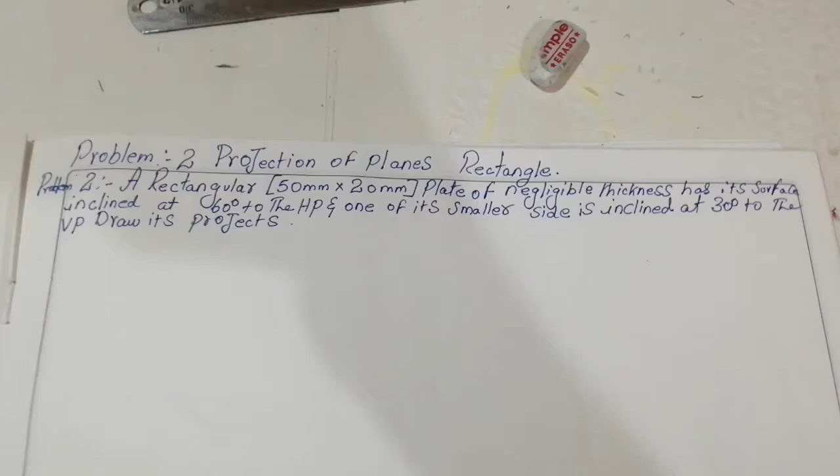Now I am taking problem number 2, the projection of plane in a rectangle. The question has given a rectangular plate 50 into 20 mm. The plate is of negligible thickness, and its surface is inclined at 60 degree to the HP. One of the smaller sides is inclined at 30 degree to the VP. Draw its projection.

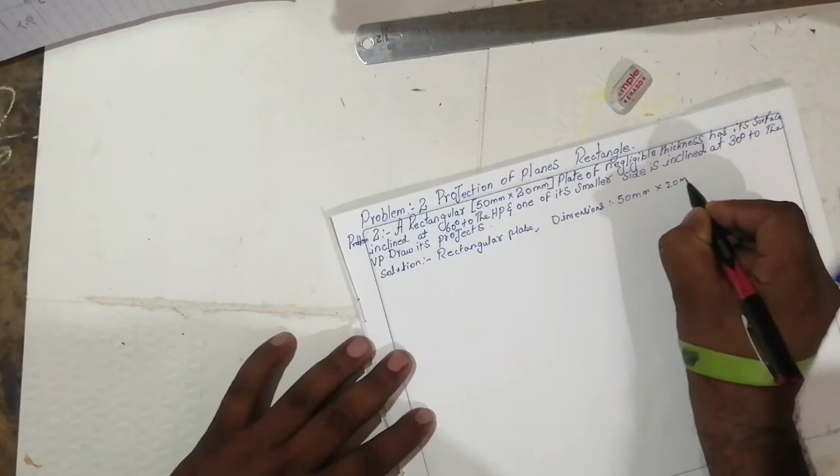So the question has been given like that. So the solution: given is the rectangular plate, the dimension is 50 mm into 20 mm. Theta surface is 60 degree, the angle made with HP.

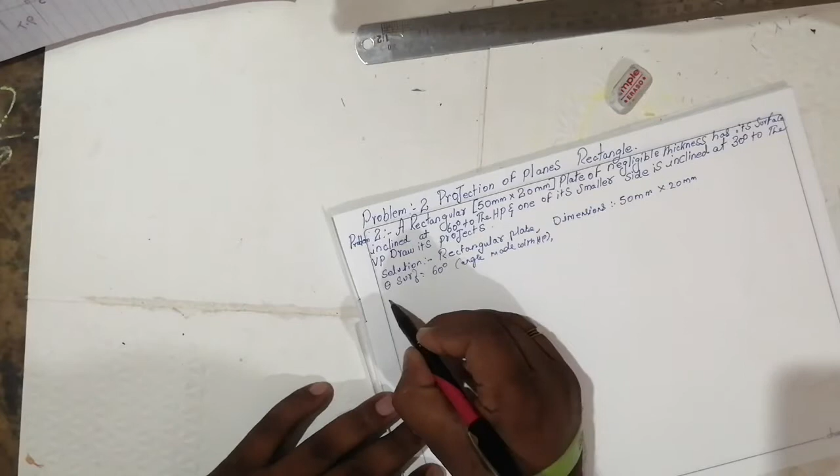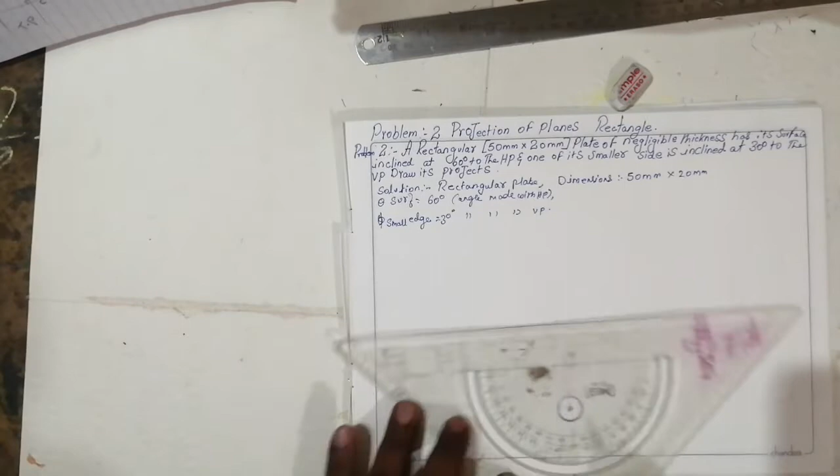Phi smaller edge is 30 degree, the angle made with the VP. So the question is given like that. Take x-axis and y-axis. It will be like this. This is x, this is y, HP and VP.

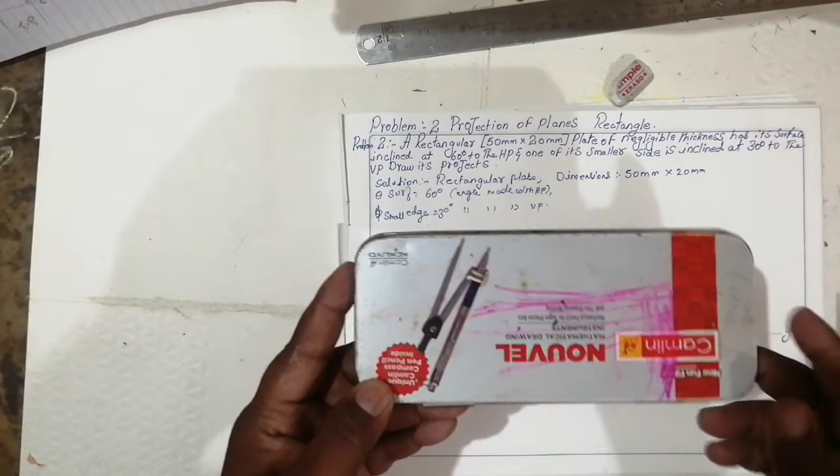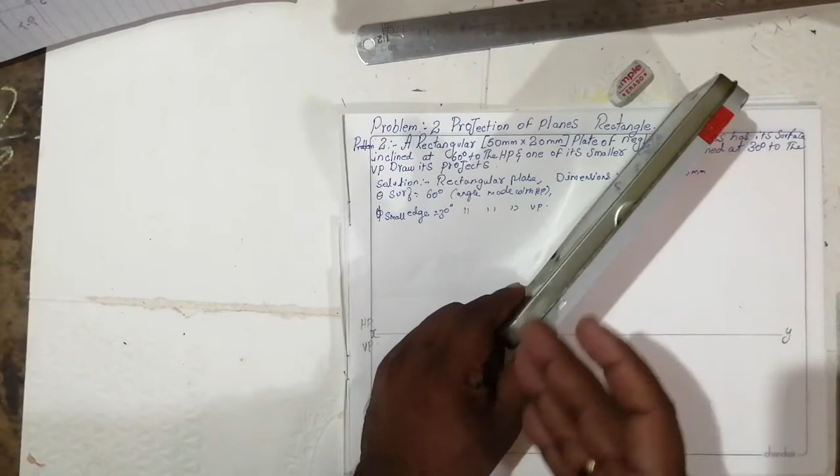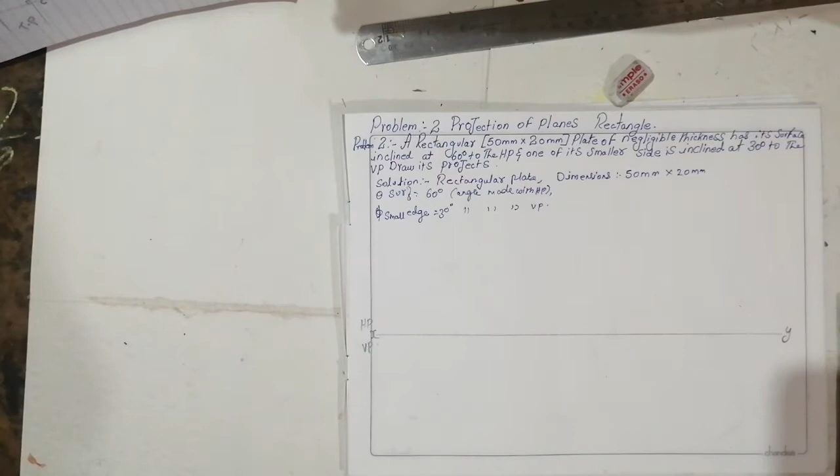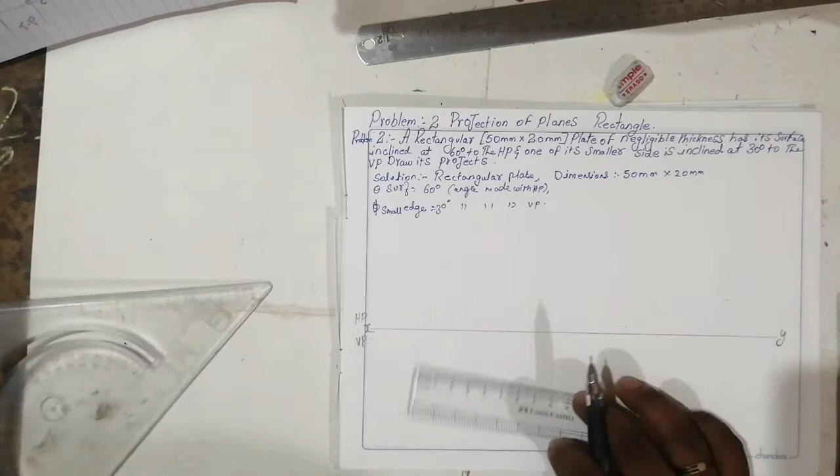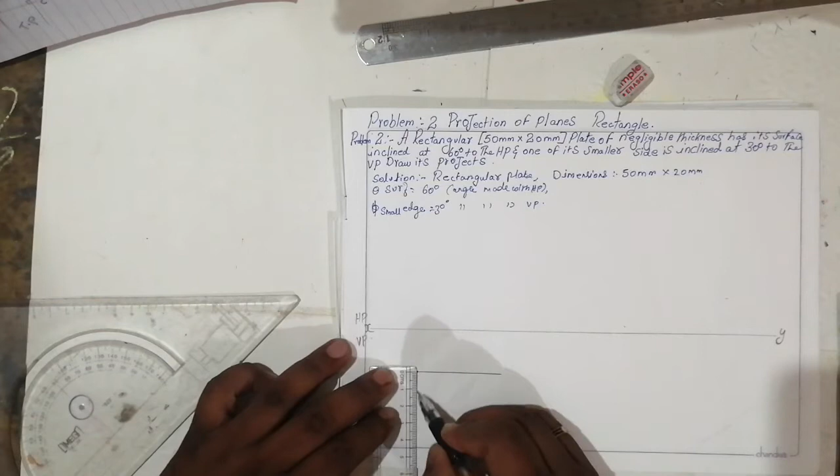The question gives 50 mm. So draw a rectangle of 50 mm and 20 mm, as given in the question. Name the corners A, B, C and D.

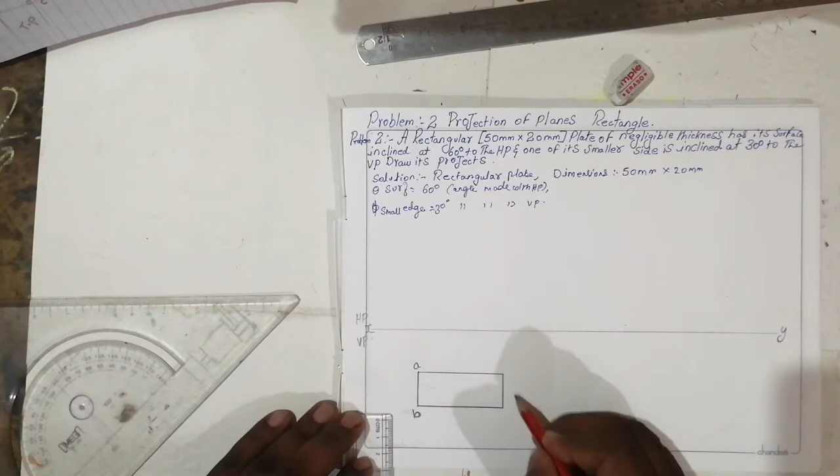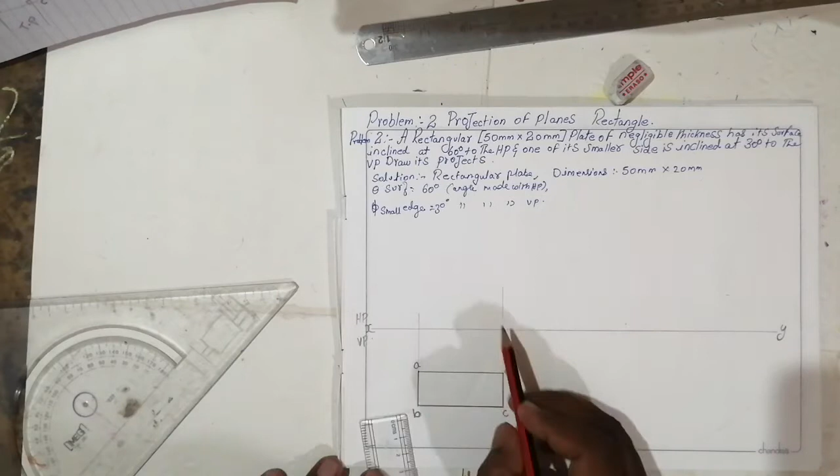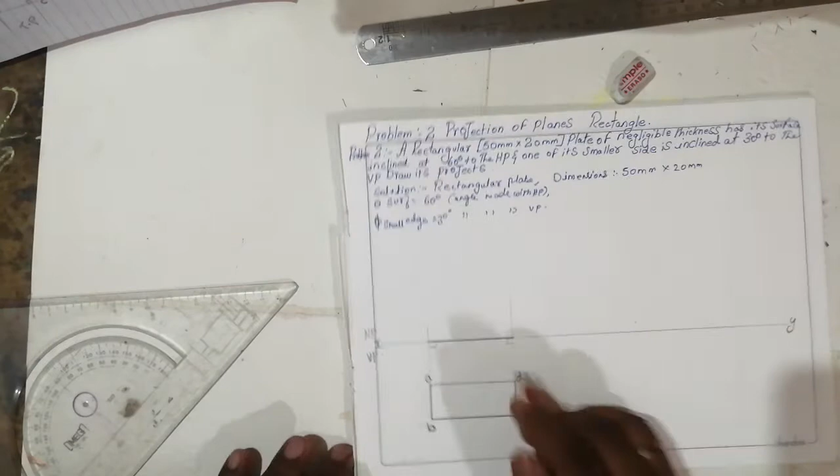Draw a vertical line, so it will be 90 degree. So if you see from the top, you will get A dash, B dash, C dash and D dash. This is from the top. This is the front view, assume like that.

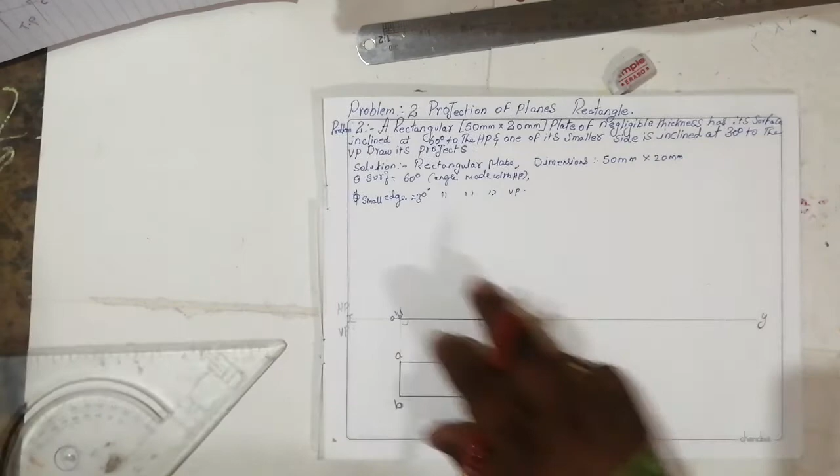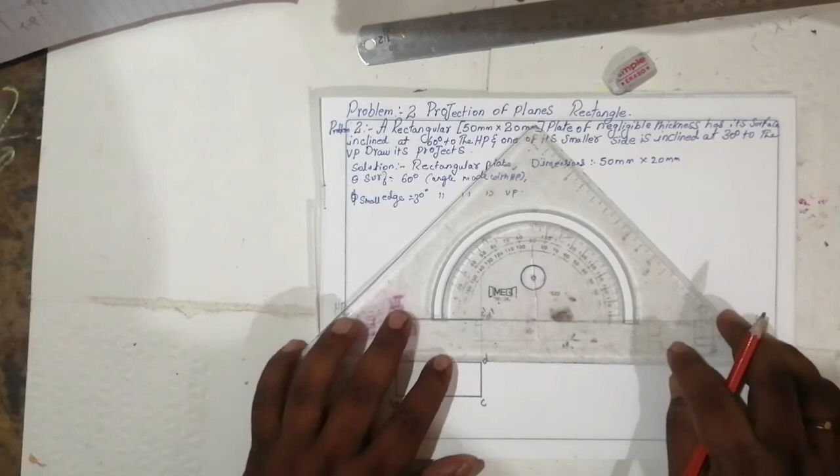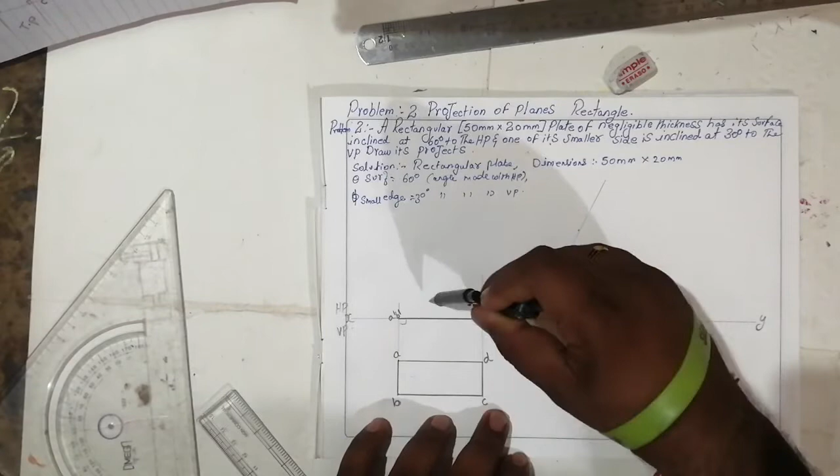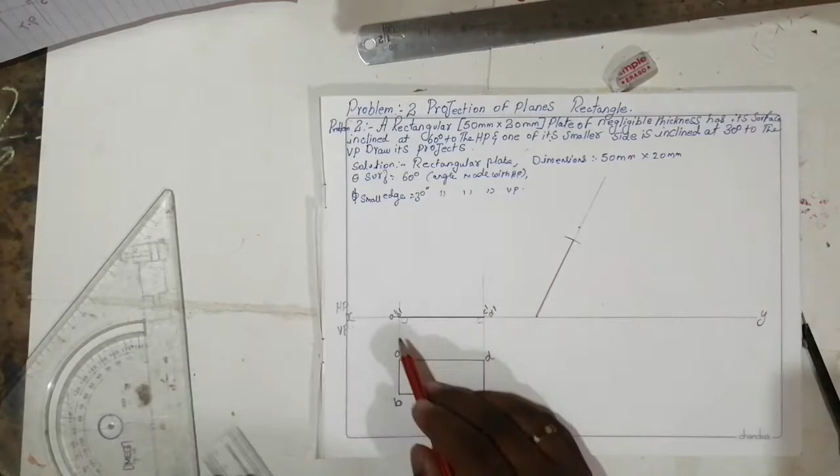After that, in the question they have given theta surface made with the HP is 60 degree. By using a protractor, take 60 degree. Take the measurement A and B. Draw one simple extension line lightly. Using a compass, cut one arc. So the points will come clearly: A dash, B dash, C dash and D dash.

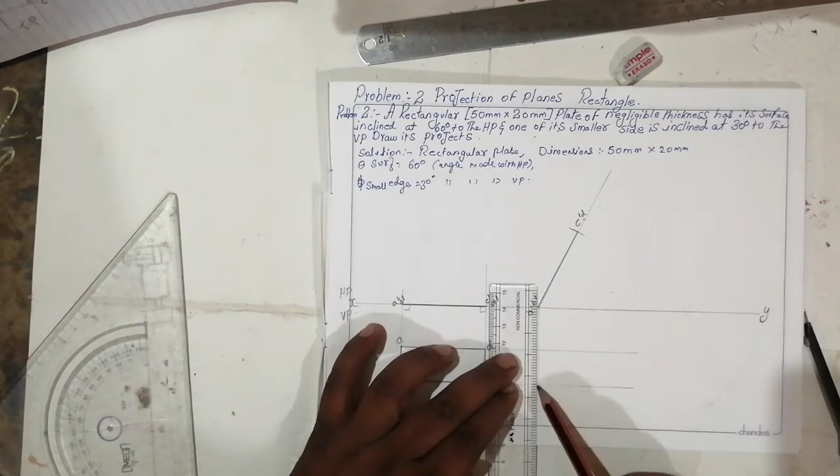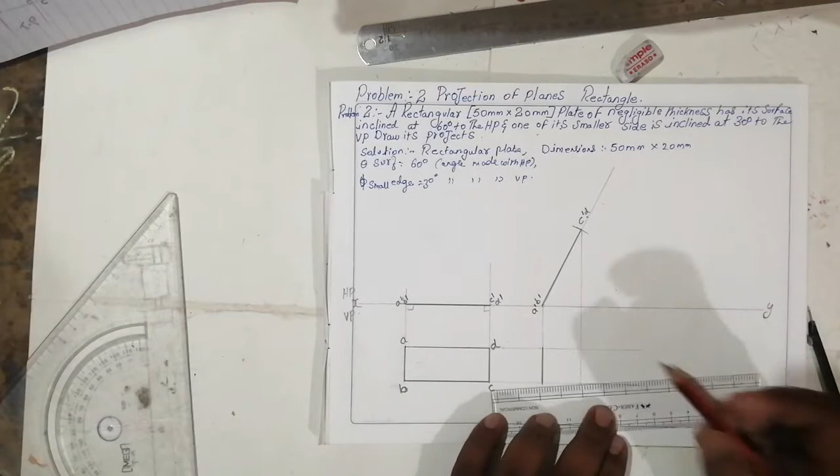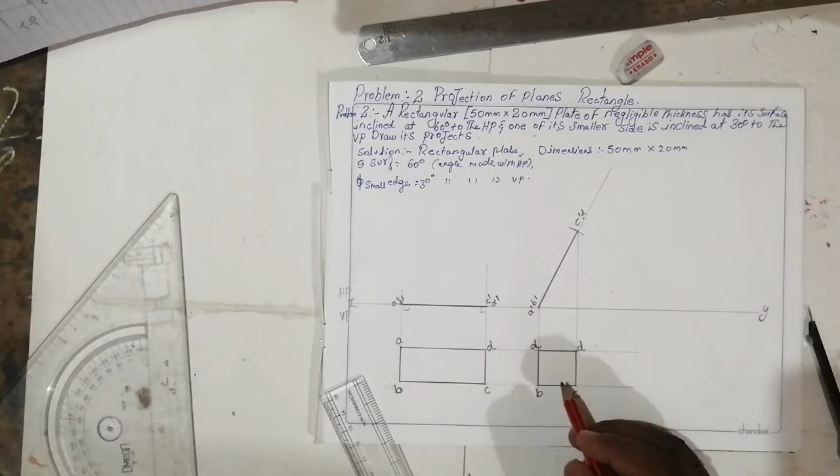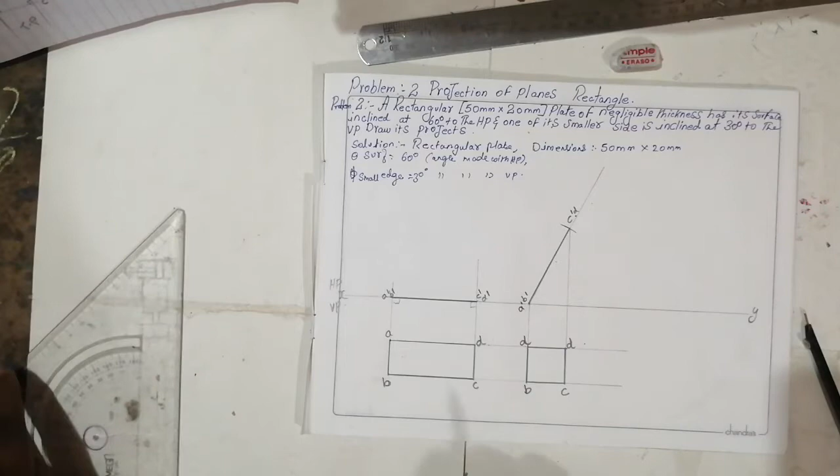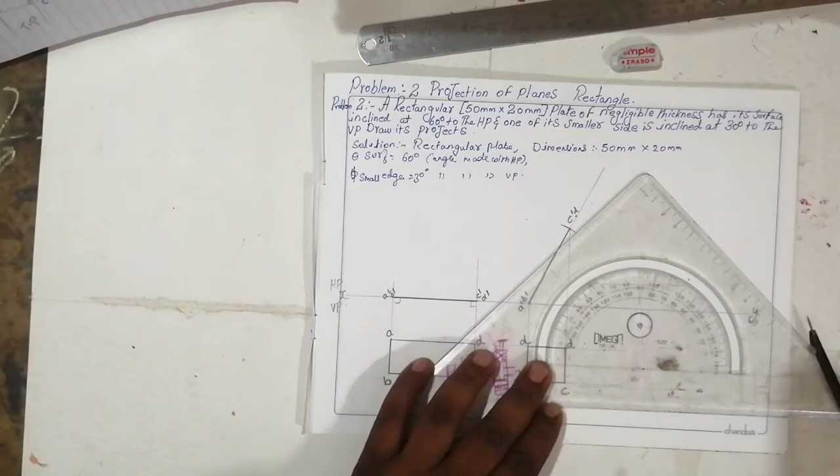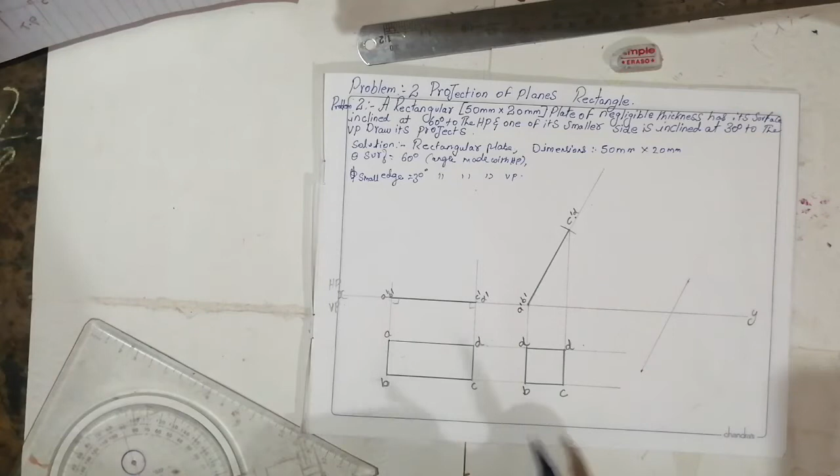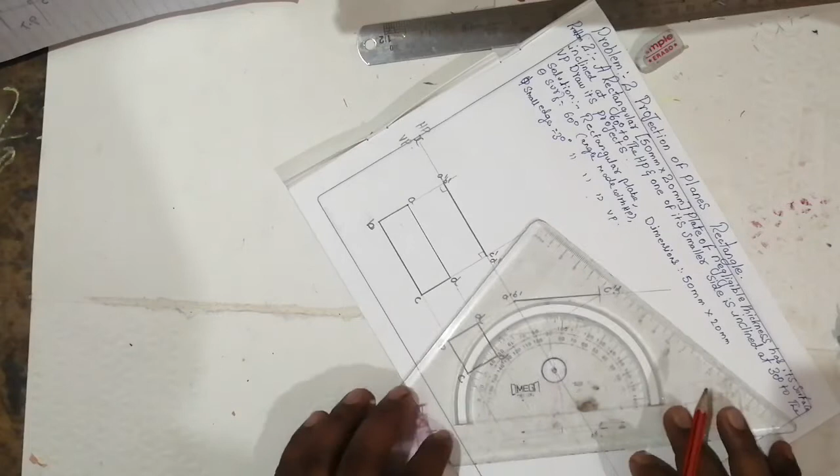We have to take any point and keep an angle of 60 degree like this. After that, cut an arc. Draw a 90 degree angle like this. Draw lightly, so it will come like this.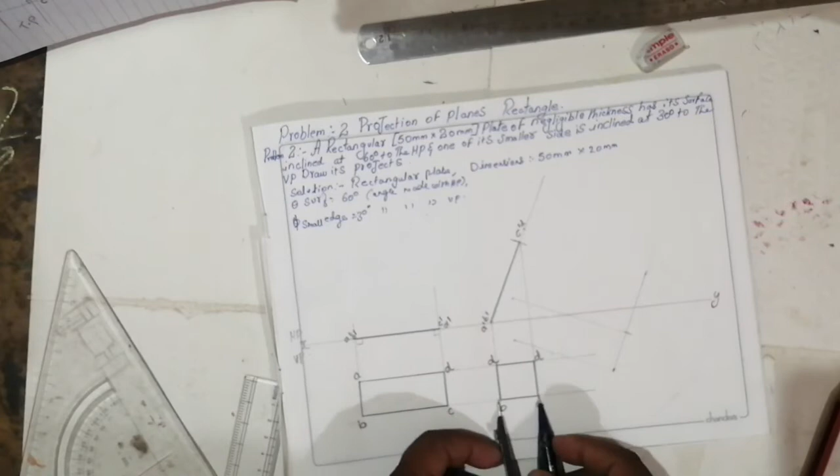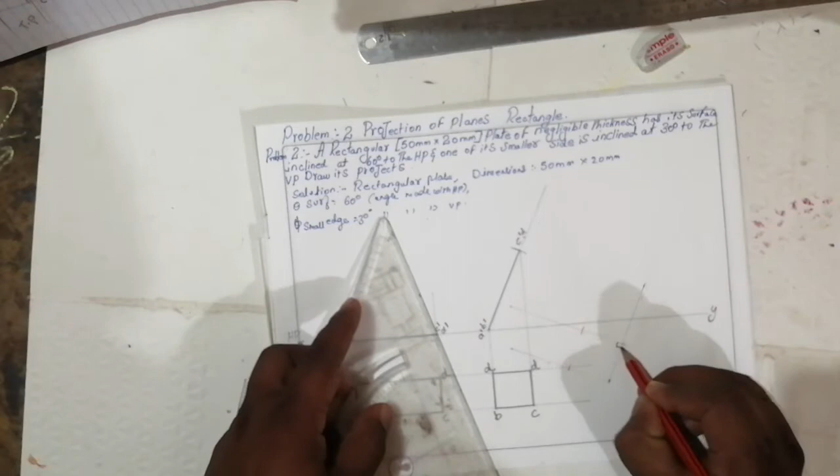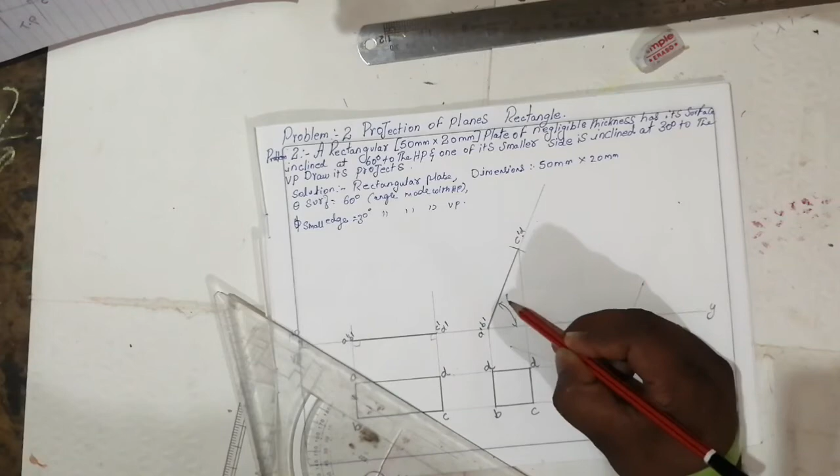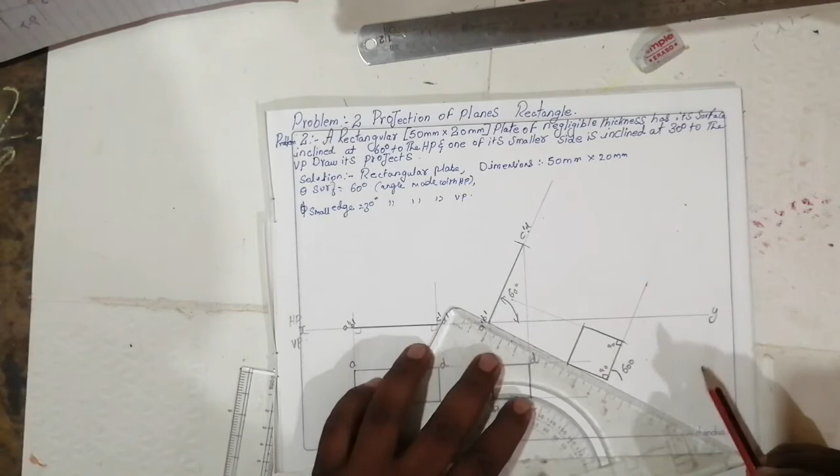Take the dimension BC and cut an arc, so that this angle will be 90 degree. This angle I have taken as 60 degree. This angle also I have taken as 60 degree. You check here, it will come 30 degree. If you check this line, you will get 30 degree.

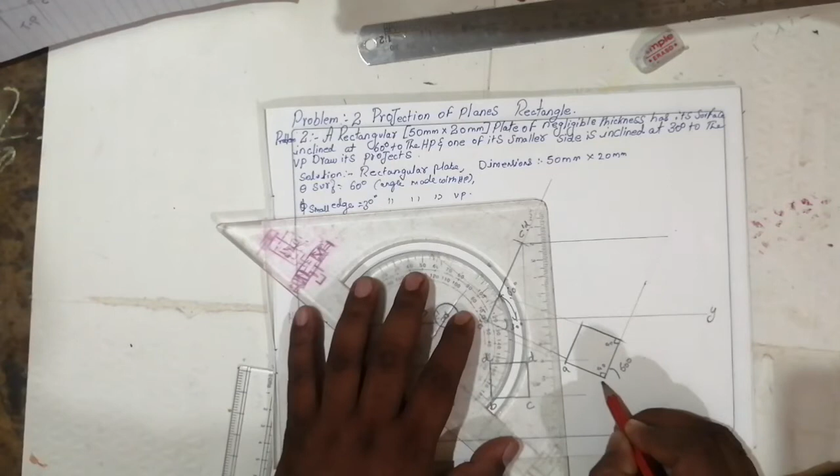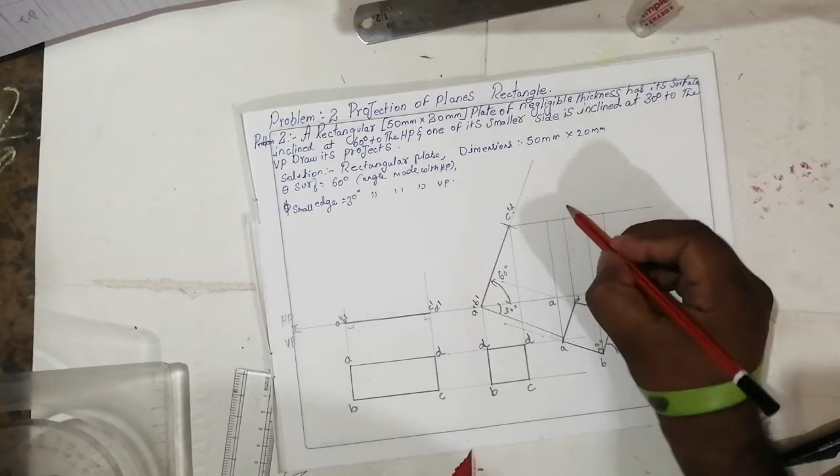Keep the protractor and draw extension lines. This is the point. You will get A, B, C and D. Keep on extending like this. You will get a point like this. This is A, this is B, this is D, and this is C. Join A and D, C and B. So the drawing will come like this.

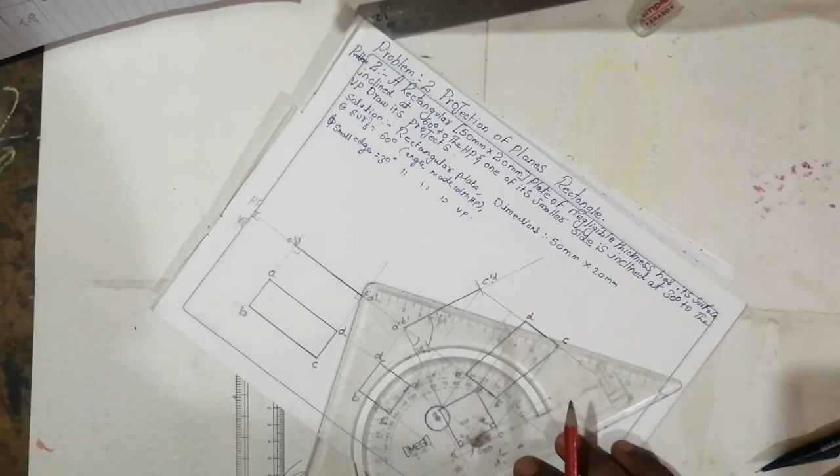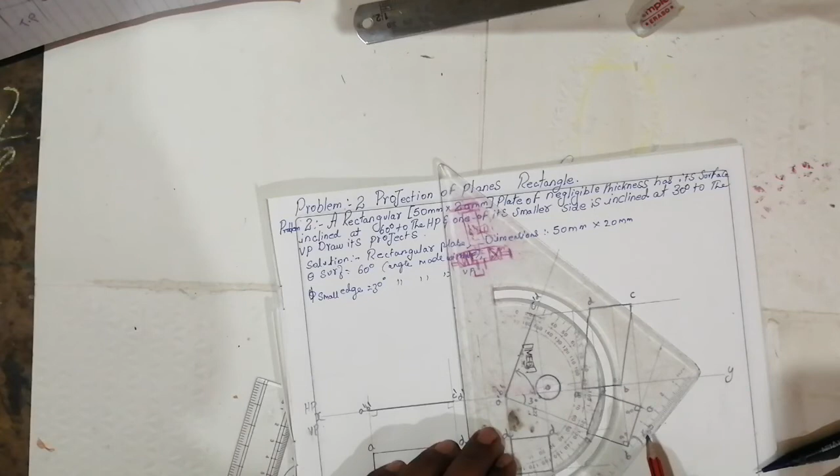If you measure this one, you will get 30 degree. If you subtract 60 degree from 90 degree, you will get 30 degree. This is the class.